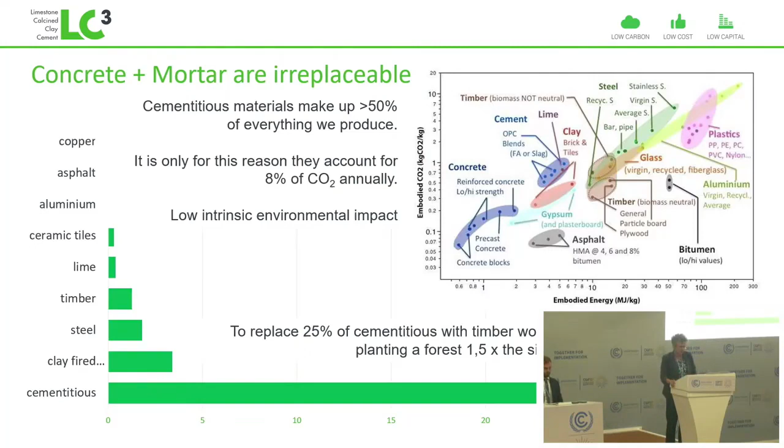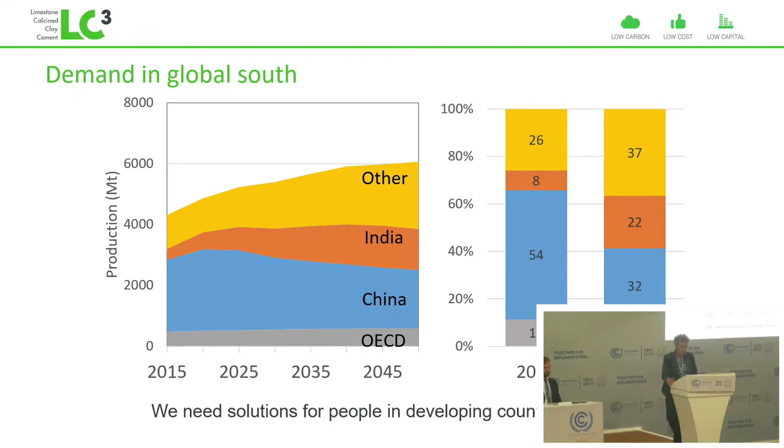And demand is going to go up mainly in the global south. So China, I think, has now peaked. It's going down, but India is coming up. And then other countries, notably in Africa, the demand for cement in Africa by 2050 is forecast to increase by about tenfold. So where would we go with these emissions? Well, we are limited by what we have available.

So unfortunately, most of the emissions which are coming from cement are due to this breakdown of limestone, calcium carbonate, which breaks down to calcium oxide and CO2. So people say, well, can't we produce something different? But the long and short of it is that Portland cement is actually an inevitable consequence of the chemistry and geology of the earth. And there's no material which can substitute it in the quantities we need.

But that doesn't mean we can't do anything, because we can very much do anything. We can substitute a large proportion of these materials by what we call supplementary cementitious materials. So this idea has been around a long time, but today the materials we're using as replacements are what is called slag and what is called fly ash. So fly ash comes from burning coal, which of course is the first thing we've got to do to prevent climate change. And slag comes from the production of iron, where also it's really imperative to find better low-carbon solutions to production of iron.

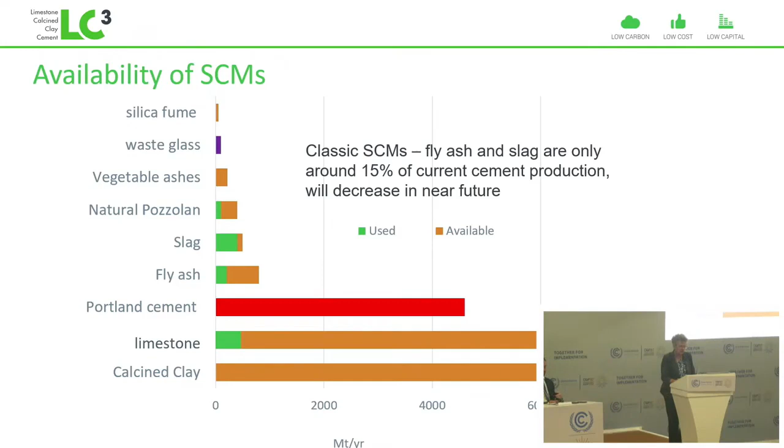And when we really review what's available on Earth, we see, well, we've got an awful lot of limestone, and we can use that as an additive when it doesn't break down, doesn't give off CO2. But we can only use a certain proportion of that without losing the performance. And really what we realized was the only material that was available in the kind of amounts we needed was clays that could be calcined.

So this is what led us to the idea of what we call LC3, to realize that this strategy of substitution was the best strategy because it can be done by everybody, it can be scaled, it can be developed very, very fast, but the only material available in the quantities we need to expand this technology is calcined clay. And then we realized that if we combined calcined clay together with limestone, we actually got a synergetic reaction which allowed us to go to even higher levels of substitution. So this is the idea of LC3.

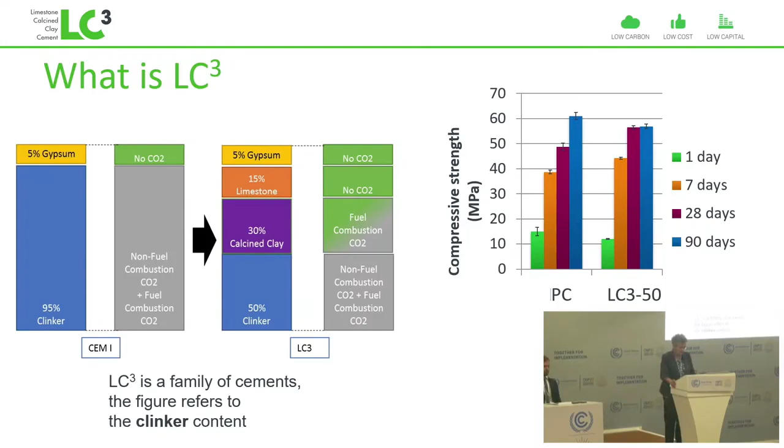So even by a few days, we have higher strength than in the reference Portland cement material. So here we have used 50% less clinker, 40% less, that equates to 40% less CO2, and we can have similar performance in some respects, notably with resistance to chlorides and alkali silica reaction, which are two problems of durability. Then we have much better performance.

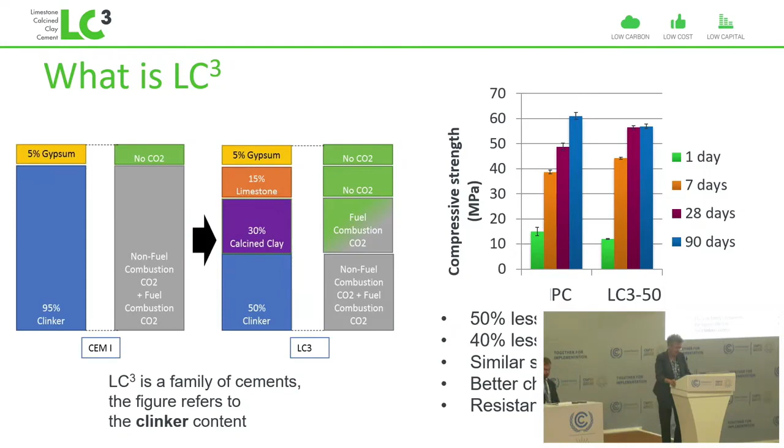So our key question at the beginning of this work was really to identify what kinds of clays. And this is very important because we found we only need about 40% of this mineral we call kaolin. We don't need very pure clays. We just need really common or garden clays you can find really everywhere. And so this does not compete with other applications. This is another misunderstanding a lot of people have. And in fact, even better, we can often use wastes of other mining operations for this material.

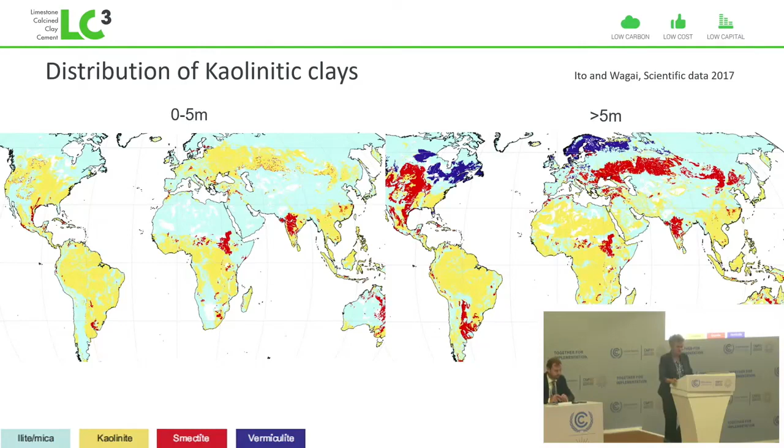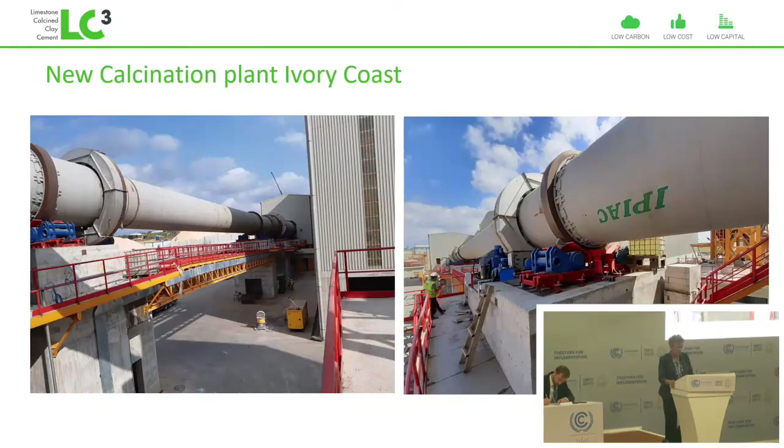This is the plant in the Ivory Coast. There's probably only about 4 or 5 around the world today, but we know of at least 30 or more projects which are coming online in the next 1 to 2 years. And this is really seen now by the big companies as the most viable option for reducing CO2 fast and at large scale. What's even more interesting is it's actually cheaper.

So rather than having to pay a premium, we can actually reduce the cost of production compared to the reference Portland cement. And that's extremely important because, while we all want to reduce CO2, we have to be realistic that what drives industry is cost reduction. And if we can offer them this cost reduction, we have a lot more chance that they will take this up.

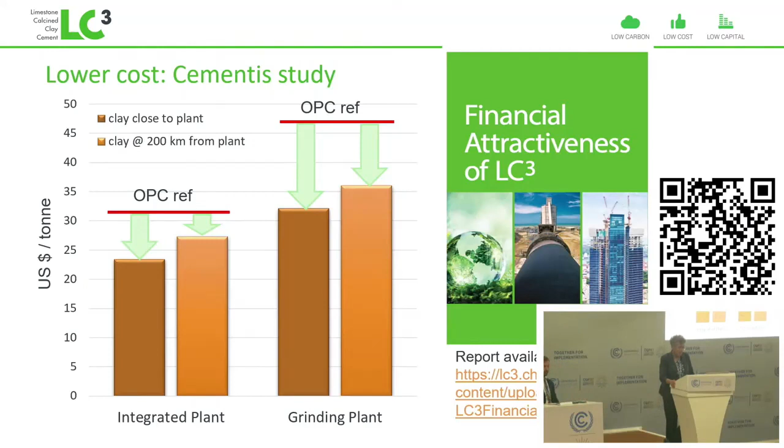But I think, in fact, on a horizon of 2050, we could imagine to go much further than that. We could reduce even by double or more, which would save around 800 million tons of CO2 a year. So this slide just summarizes why this is a very interesting technology, because it can save CO2, because it limits the use of scarce resources. We can use waste sources. We can have the same performance as the material today, and it can be used in exactly the same way. You can substitute one-to-one. It's a technology you can really roll out at full scale.

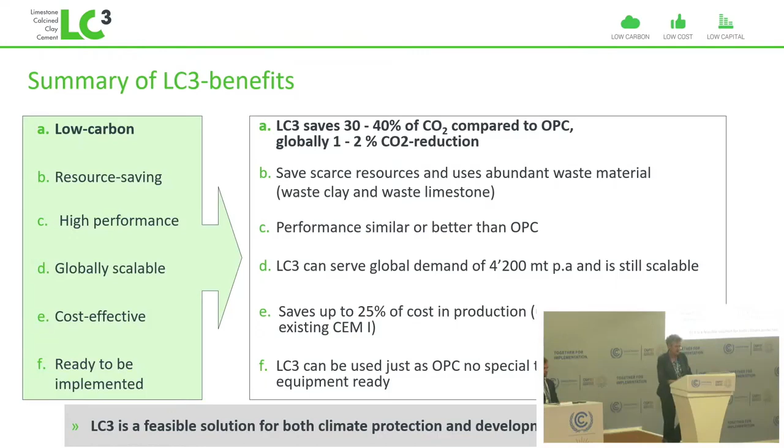So this is how we're tackling reduction of CO2 in the cement and concrete business, but this has to come together with the kind of measures we've heard about in previous presentations of reducing demand. And we can reduce demand without really any compromise, because it's been well demonstrated that most buildings today are over-designed and typically contain 30% more concrete than they need. So we haven't even got to change any codes, we've just got to make sure that people stick to the limitations that are already well established.